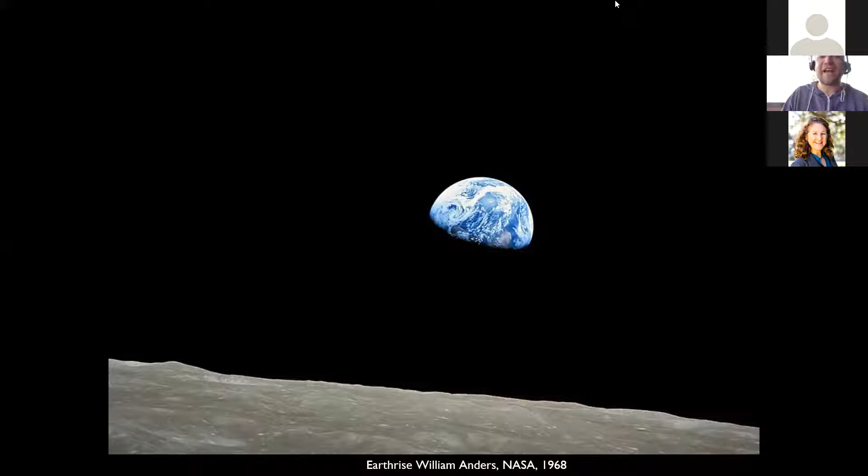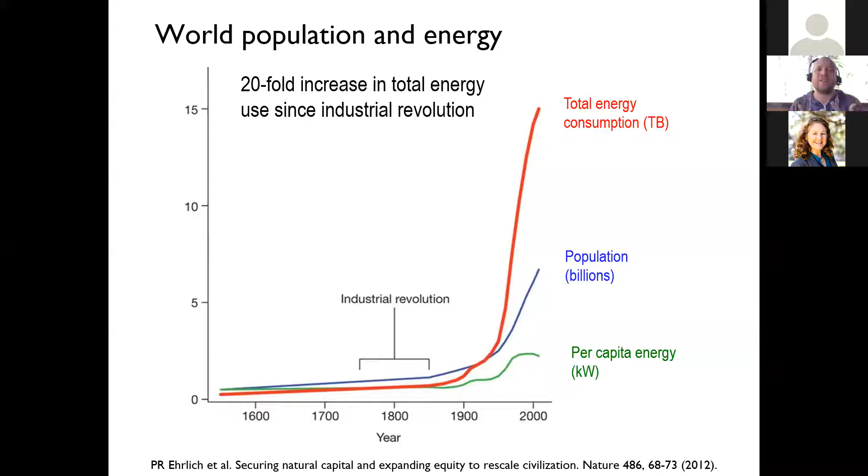So with that, we're going to launch into a whirlwind pace. We know that everything is collapsing around us. It couldn't be more true now than at the beginning of the semester. But with increases in population, the climate is taking an impact, and associated with that are the health impacts with emissions that make you more susceptible to pandemics. All of these things are intertwined, and all the topics within 140 are really part of an interconnected web where each piece actually influences the others.

We've learned about where industry uses energy—from buildings, transportation, manufacturing—and about embodied carbon versus operational carbon.

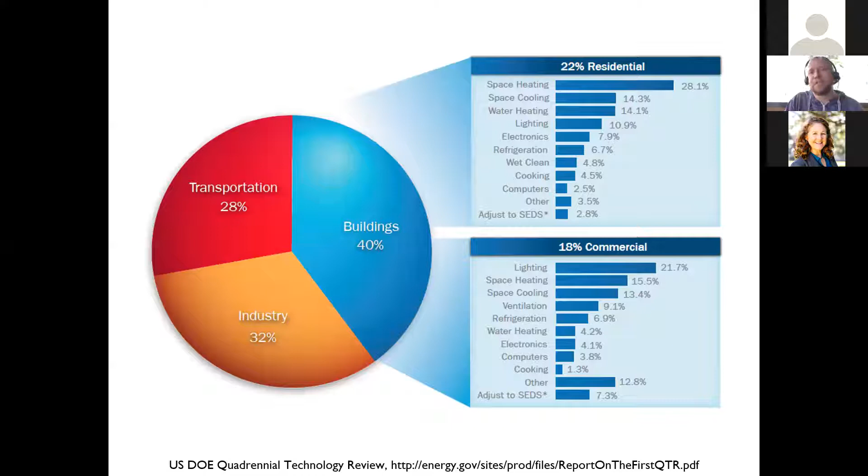At the same time, we fully realize that we can't just shut down the world to stop our emissions. I think right now, with everybody staying at home, you've seen a really robust reduction in emissions, but it's not sustainable for everybody to stay home and hole up. There are a lot of jobs that require being out in the world and energy to be used. But the role for us as designers, engineers, and architects is to apply that energy in the most efficient way we can for the lowest emissions, and try to look at more holistic solutions from the energy standpoint. We learned about impacts to health.

This couldn't be more applicable now for our office in particular, as we're doing a lot of work with hospitals right now to rapidly transition them from ICUs into isolation rooms. A lot of the elements of health, building efficiency, and emissions actually have a direct impact on your body's ability to fight infectious disease. So there's a correlation between the stuff that we talk about in 140 and the impact on real people's lives.

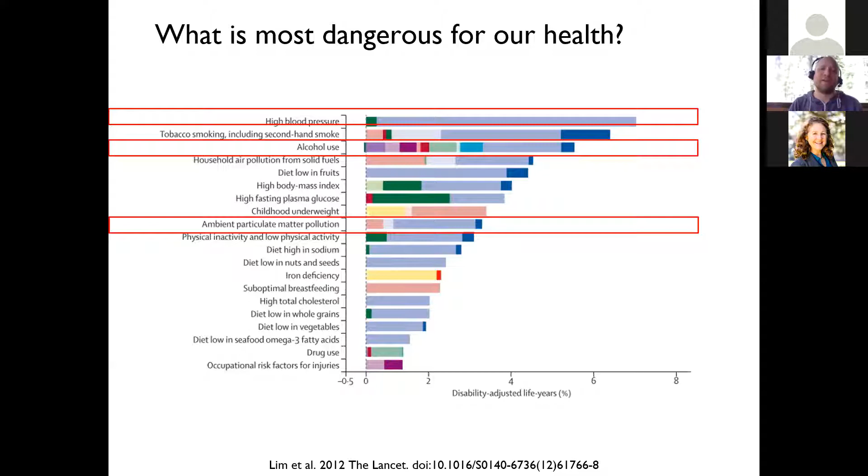We talked about thermal comfort, how your body begins to sense energy, temperature, humidity, air flows around you, and how buildings can begin to respond to that through reactions in shading and facade design.

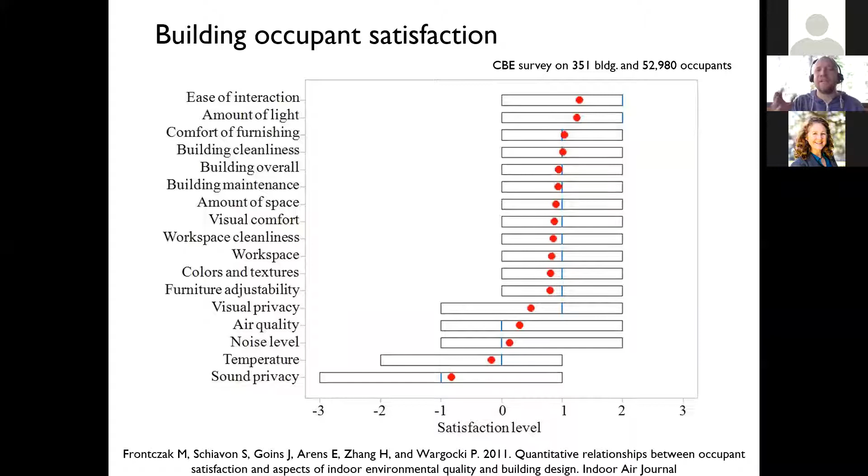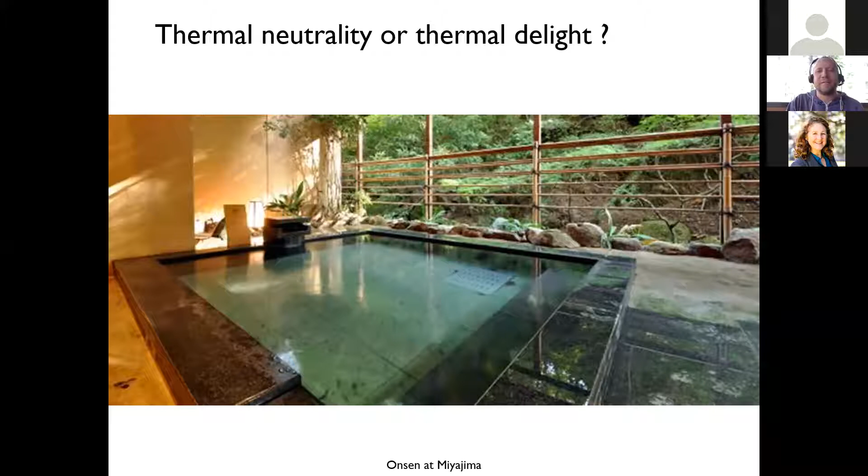We talked a little bit about occupant surveys, post-occupancy evaluations, and trying to learn from the workplaces. Some of the exercises that you guys did in lab are actually adapted from real POE processes that we use in life. Gail talked about thermal delight versus thermal neutrality when we talk about thermal comfort, variations in space, and trying to get away from this idea that steady state is normal, because we know that it's not.

We folded in the ASHRAE thermal comfort standard and the expanded thermal comfort study or standard. I can tell you right now that I use this, granted I'm a mechanical engineer doing heating and cooling systems, but we use the standard every week on every project. A lot of the really exciting work that we do is finding novel ways to maintain comfort with lower energy use, and sometimes that means thinking outside the box.

But again, the robust work for you guys of understanding how the body actually perceives space from a thermal standpoint is really important. And it hopefully will change the way that you design buildings.

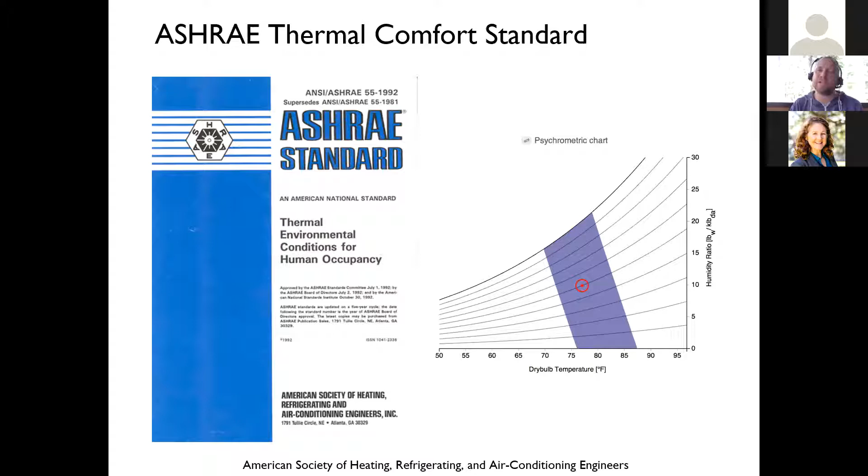We briefly talked about the psychrometric chart, how to move around it, what it means for humidity and temperature working through the space. But I think one of the most important diagrams that we talk about in this class is the inverted pyramid. So if there's one thing that you can take away, I hope it's this.

And I hope that you think about this on every project, because I know we do in our practice, starting with the dumb and simple things about reducing loads, thinking about passive systems, how your building fits into the climate, your climate analysis, even your final project where you guys are doing climate analysis. It's not just about doing it and throwing it on paper, but eliciting out or pulling out from that data, what does it mean? What does it tell you about seasons, about different times of the day, and which passive strategies could really align with your location?

We jumped into active systems, and I talked extensively about energy recovery, one of my favorite things, and then getting to net zero energy through renewable generation. So this is definitely one of the elements of 140 that resonates the strongest with me.

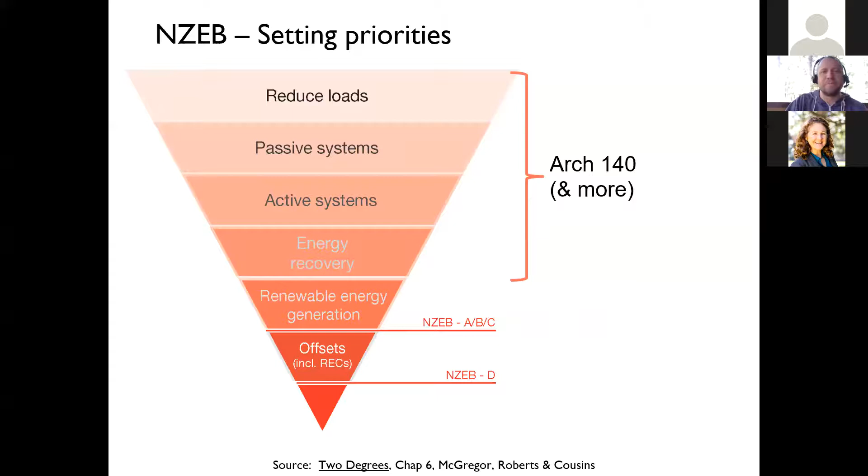We talked about how building massing has changed over the years, especially with the advent of air conditioning. Gail talked about that in the HVAC lecture. But understanding that we've moved away from these skin-dominated buildings that were really well daylit, very well naturally ventilated, and we've moved to sort of sealed boxes.

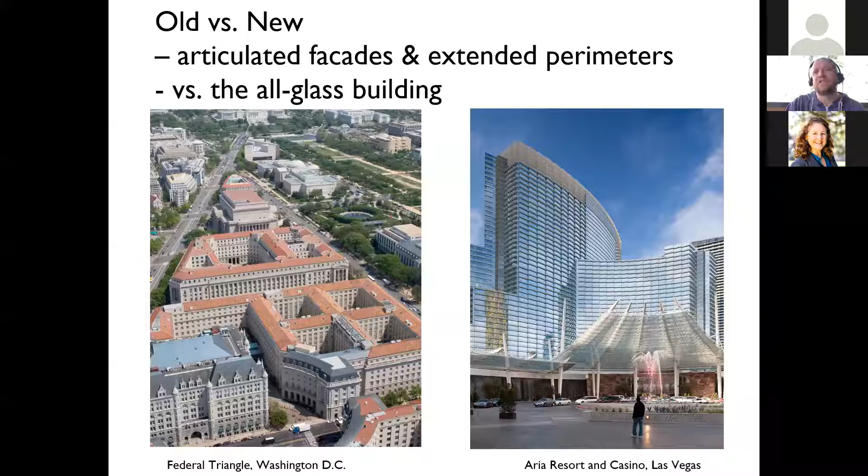And now there's a huge movement within the industry to move back, which is really exciting to watch, and get away from the normative design of the dumb solution and the easy solution of just doing an all-glass building. We talked about lots of case studies.

I think if there's one thing, before you leave for the semester, I really encourage you to download all the lectures if you haven't already, because there's a lot of case study projects in there that will give you sort of inspiration for the future.

The Lucile Packard Foundation building is one that still resonates with me all this time, both as a beautiful building, but also a really low energy building with great responses from staff and faculty inside about how comfortable it is.

If you go all the way back, super far back in the semester when we were talking about thermal mass, it even came all the way up until the balance point game in lab, understanding the role of materials in the building to store energy and to give you load shifting.

So it wasn't just about comfort that we talked about at the very beginning, but also pulled it all the way forward into the HVAC lecture, our electrification lecture, where we were talking about load shifting, and that the thermal mass of the building can actually provide some of that load shift that we're going to need to design grid-responsive buildings as we electrify and decarbonize our society.

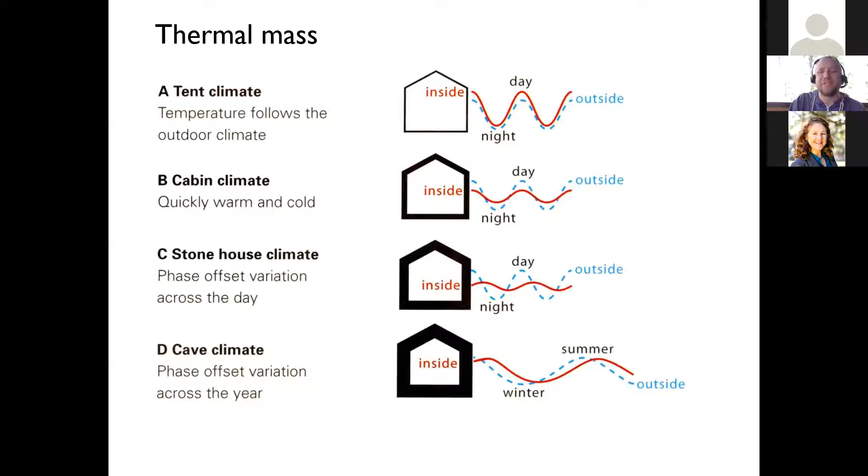We had some examples. I'm not sure if the Dominus Winery actually showed up in one of our thermal mass lectures, but it's a lovely project in Napa. It's private, so please don't show up without an appointment - I tried that and got in trouble. But it's a lovely project that incorporates both elements of thermal mass, climate-specific design, as well as gorgeous lighting effect and daylight strategy.

Another one of my favorite topics, we talked about thermal bridging. With all the ski resorts closing very early this year, I had wished I'd gotten to do more of this, but it's a great place to reflect on what you guys know now about building facades and building elements. We tied that back to the three modes of heat transfer: conduction, convection, and radiation, and understanding how air movement across the site can actually strip heat off of your building.

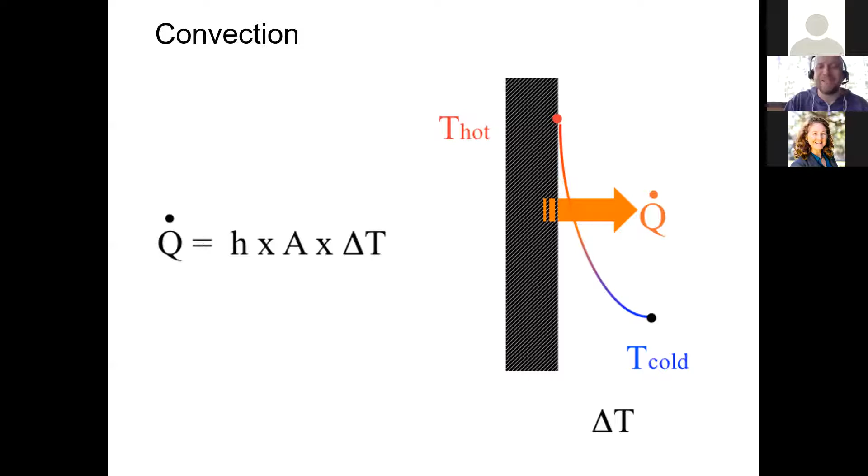Those air films - don't forget, every U value that you calculate must include the air films. Air films are your little friend that should carry with you.

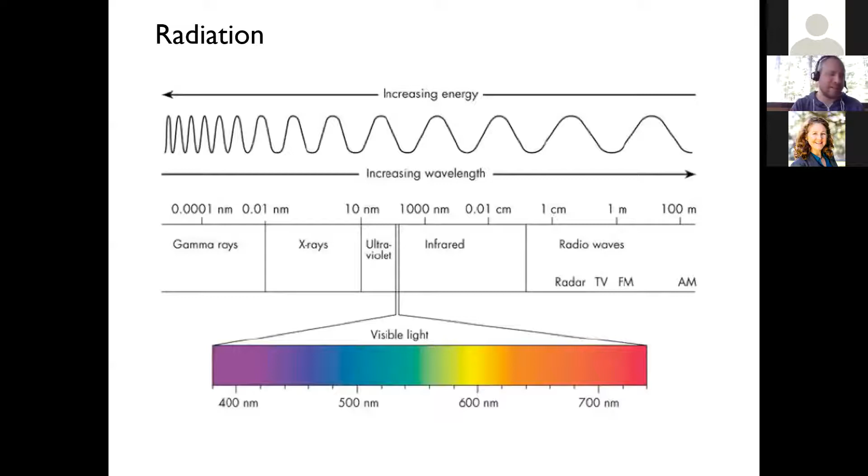For radiation, we talked both about the near infrared as well as the visible light portions. The infrared being that heat piece that we are trying to fight against or protect against. Those are a really key element.

Briefly talking about the impacts of materials on radiation, so designing cool roofs in lieu of dark asphalt roofs that we had historically, and how that can reduce energy, increase comfort, and reduce heat island effect.

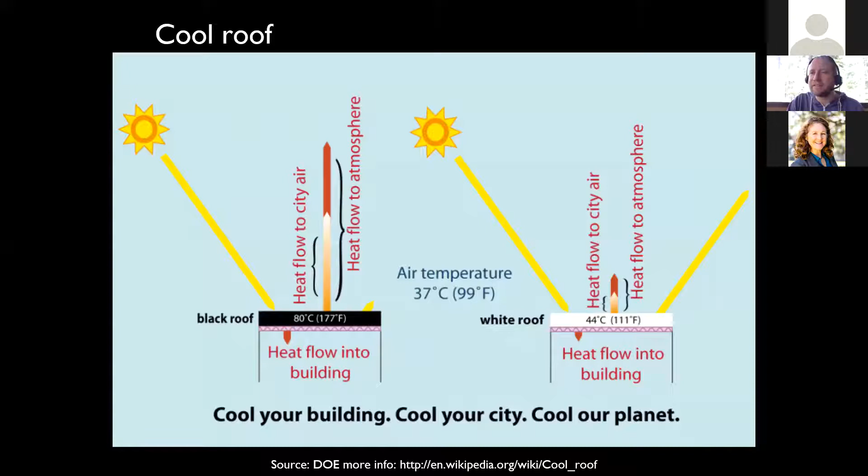That same radiation we can actually use as a tool. So I showed a lot of images of false color thermal camera images, looking at surface temperatures and trying to identify locations of air leaks or missing insulation or air ducts that are in the facade, which they should never be, but sometimes they are.

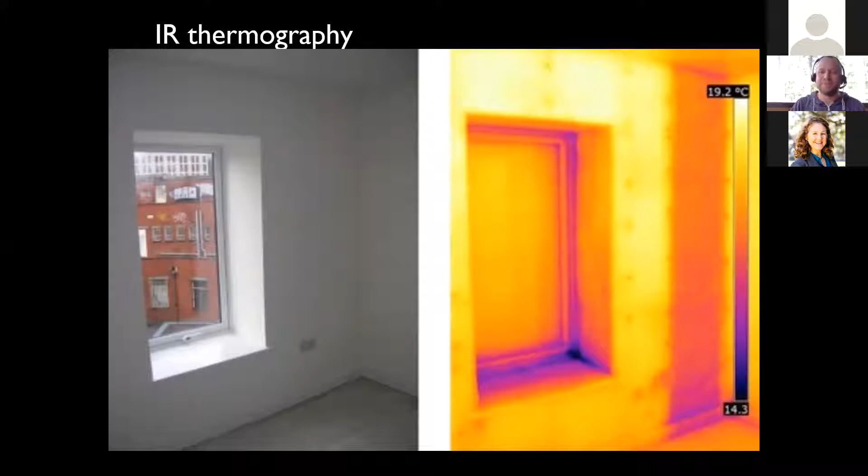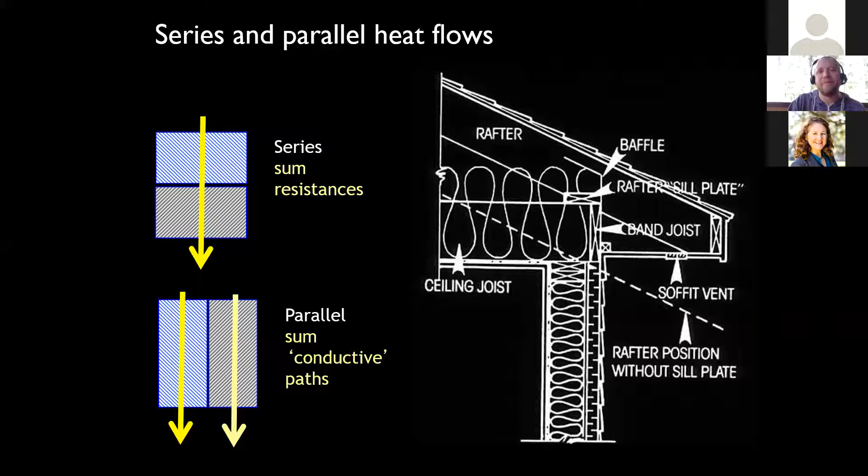And I know all of you thoroughly enjoyed covering series and parallel heat transfer and the house box that we studied for what felt like 7 weeks, starting with series and parallel heat transfer and moving into understanding what those assemblies are, doing therm analysis, or at least looking at therm and understanding its role in evaluating windows. For the series heat transfer, all the lovely R values that you guys now have in your heart.

What's the typical R value per inch of mineral wool insulation? Eventually these things will stick in your head - you'll know that it's 3.4. You'll know that polyisocyanurate insulation is about R6 per inch at the beginning, but tends to degrade to about R5.5.

Trust me, you'll love R values in your career, and this is just the start. 140 is just the start of being able to take those values and start building that library in your mind, to be able to react very quickly about getting the most performance out of the smallest cost, or the smallest carbon footprint, or the best health of the material.

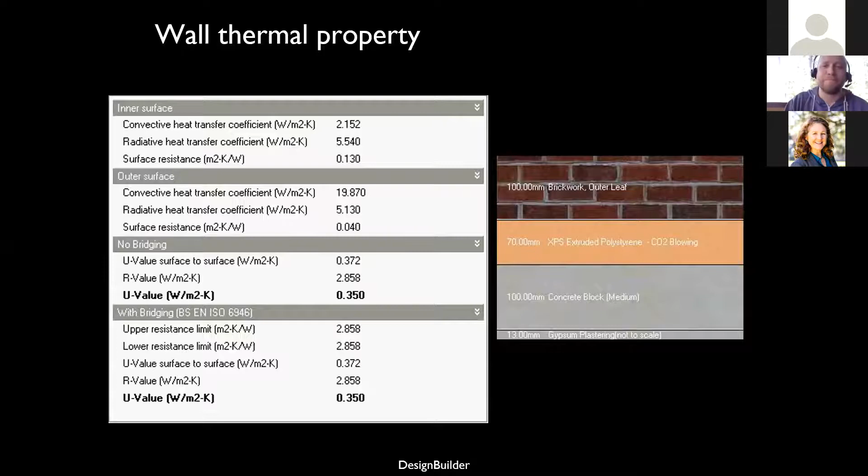We talked about the perfect wall systems. There were a lot of resources we gave you during this section from Building Science Corp - I'd definitely recommend going to their website if you ever have questions on facade design. I also listed the resource of 475 High Performance Supply, which has a series of free books on high performance buildings that are low embodied carbon and low toxicity. Great resources - pull those lectures down, use those resources.

They're really at your disposal, and again, they'll set you apart at your office. I can't tell you how many folks I've worked with over the years that don't have the 101 level of knowledge about building performance, and it gets them in trouble. So you can really set yourself apart and drive performance and human factors and health, and become the expert in the office that you go work at.

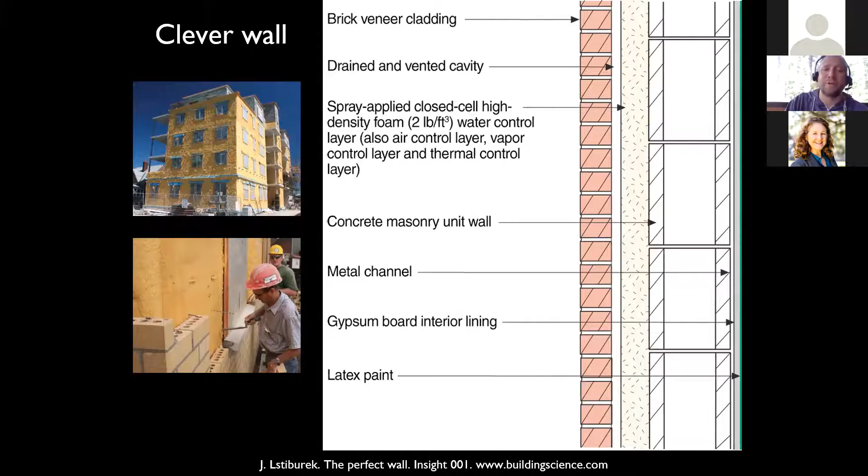We talked all about different types of materials for insulation, and when Sarah gave her lecture, she even folded in elements of health and toxicity with that. And when I talked about embodied carbon, we did the same. So there are lots of factors that complicate this decision - it's not just something that you do once and forget and say, oh, there's the material of my choice.

There's a lot of factors, and there's going to be more. So as you guys go out into the field, there will be more elements that you have to consider when making every choice. I think that's the resilience you've shown during this pandemic is the same sort of resilience you'll need in the workforce, to take on new information and change over time, so you don't get stagnated.

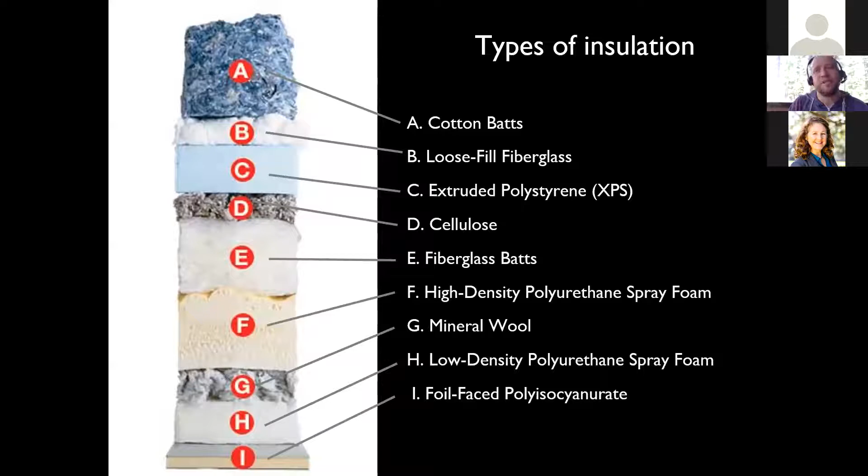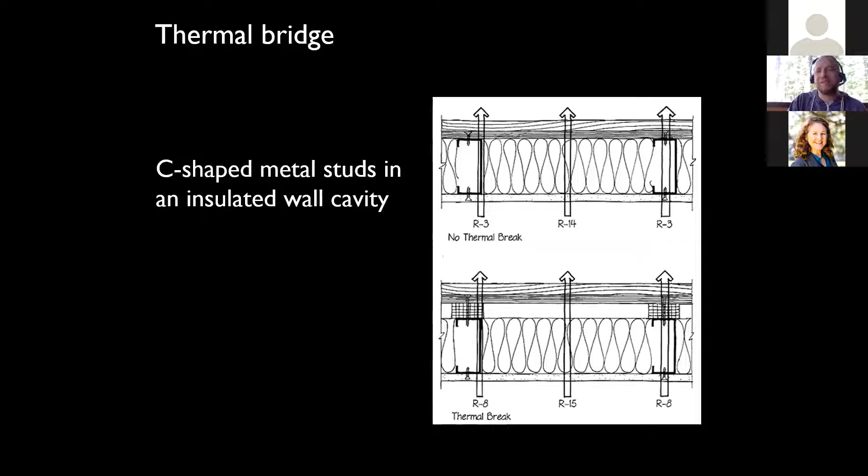Again, we talked about continuous insulation, blocking thermal bridging, and all the different thermal bridging strategies. I think I shared a lot. We did calculations for infiltration, and this is the blower door test we talked about, but designing buildings for air tightness, and then pulling all of that together into our whole building envelope calcs.

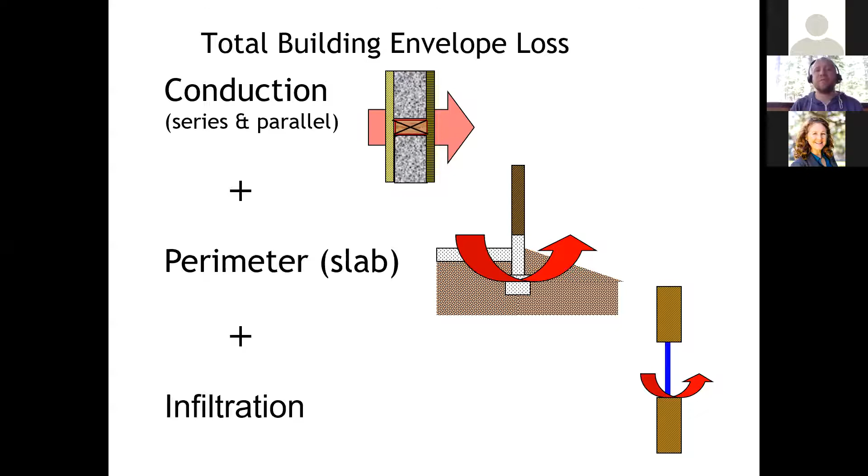Again, kind of truncated, shorter examples this year. We didn't have to do all of it by hand and iterate as much, but being able to pull in that full UA of your building that includes the perimeter slab and the infiltration and leakage. Taking that all the way into calculating your whole building energy use, and then ultimately getting you to this EUI, which is that label value that allows us to compare buildings against each other, regardless of square footage, because it normalizes against square footage, and gives you a sense of where you stand in the greater scheme of things.

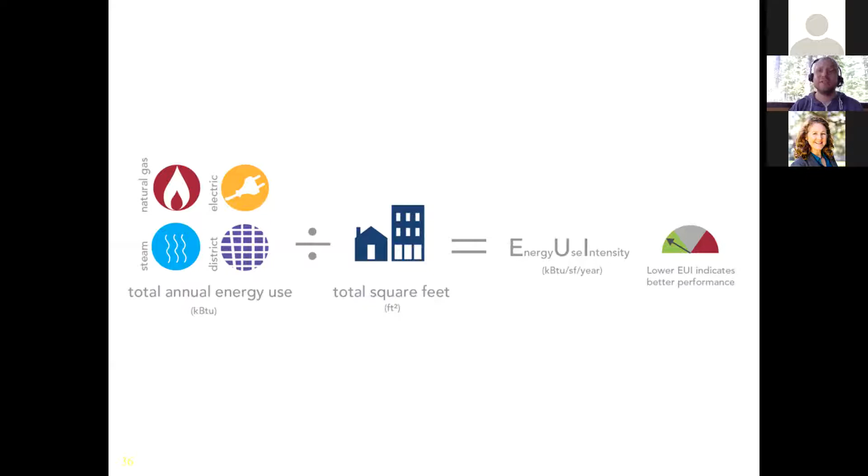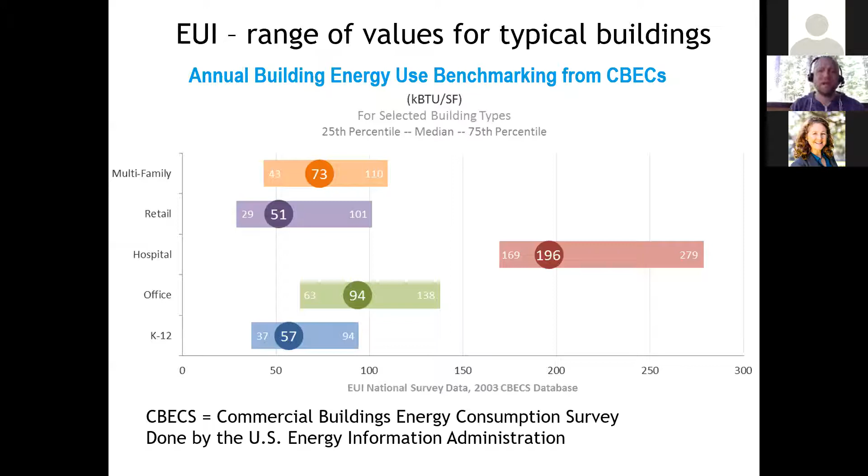Are you a hospital? Where should you land from an EUI standpoint? Are you an apartment building or a school? We can get benchmark data, but we can also design to be better than the benchmark. My goal for every project is to start with the idea that it must be net zero energy, regardless of whether they're going to do on-site PVs, but ranging that EUI to understand how you fit into the broader scheme is really, really important.

Obviously, we talked a lot about net zero. I'm super passionate about net zero buildings or net positive buildings. And I think that as you guys hit the profession, there's going to be a bigger driver from local codes, local states that are actually going to be mandating this as we decarbonize our society.

I think one of the most exciting things, if you've been able to stay around in the Bay Area during this quarantine, is just noticing the drastically improved outdoor air quality all around us. And if you're in any city—I have friends who work in New York and Chicago, and even in Dallas—everybody has noted that during this pandemic, the air quality has been tremendously better. People can see far off vistas that they haven't been able to in the past.

And it just sparks in your mind, well, that would be the case if our economy transitioned to a low carbon economy or a zero carbon economy. If we had zero energy buildings without combustion, if we had transportation that was zero energy or all electric without on-site combustion, and our buildings had gotten there, all of a sudden you start to see that this could be our everyday, where you could see Mount Rainier super clearly.

In the Bay Area, you could see Mount Diablo, or you could see past the Golden Gate Bridge out into the ocean. A zero carbon economy gets us there, and it obviously has visual impacts, but it has the health benefits as well.

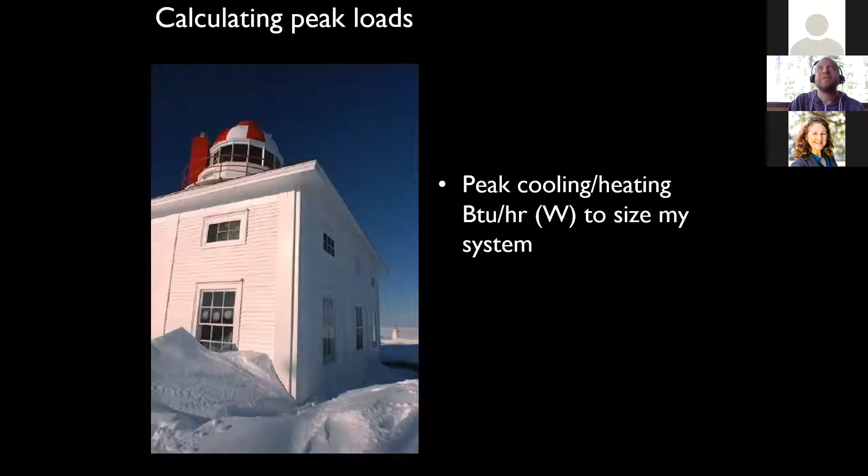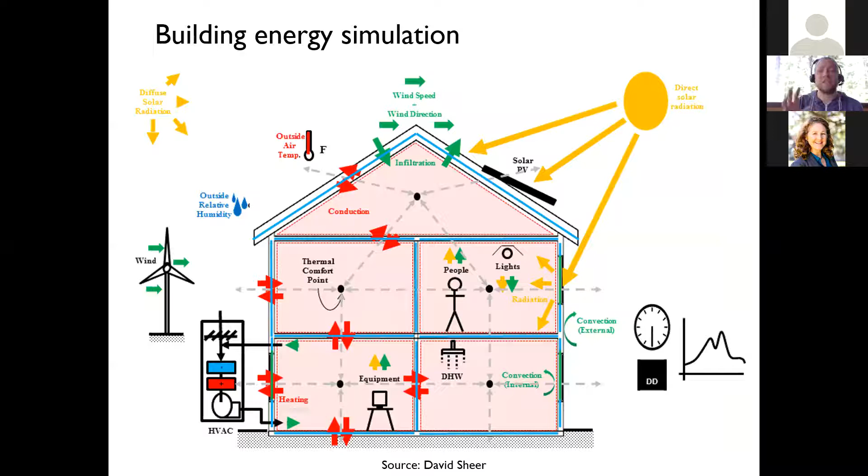So once we calculated whole building energy use, we did peak load. We talked about energy simulation, energy models, how they work, and you guys got to test out Sefaira as an early stage schematic design tool, and trying to compare your building against a baseline, whether it's ASHRAE baseline or Title 24 Part 6 baseline.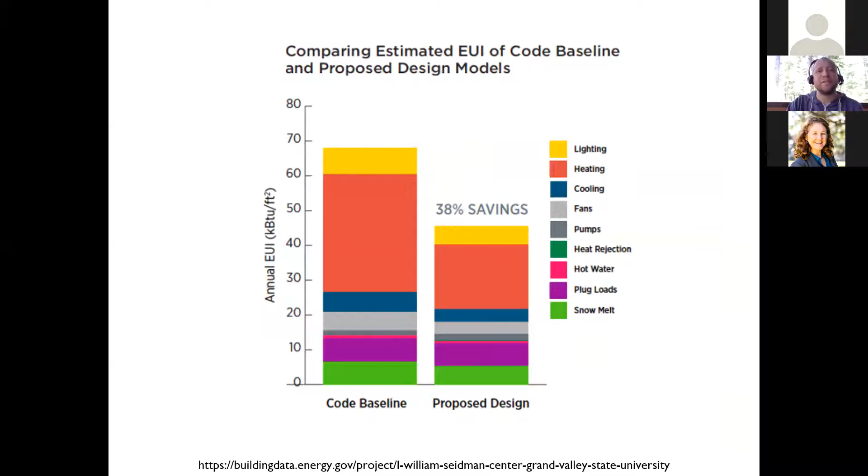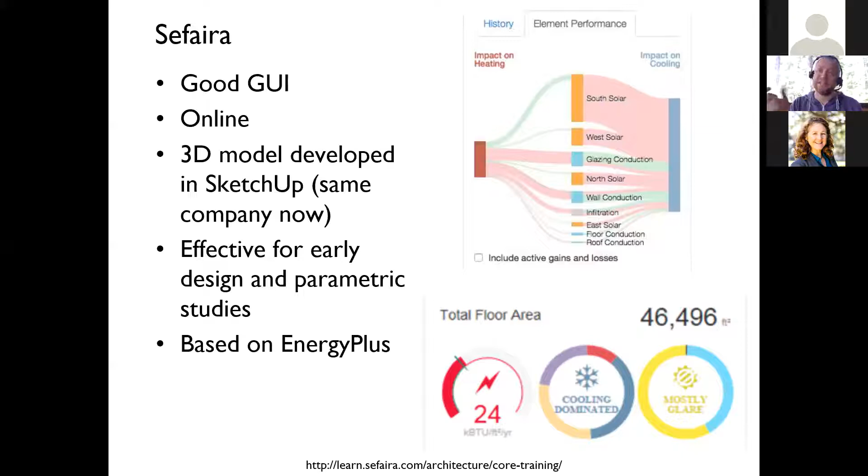And you guys got to do some iterations. We still use Sefaira in our office for some super fast, super dirty early energy models to get us in the right direction before we bring out the heavy gun. It's still a super valuable tool. And if you can actually bring that skill set to your office, it's a differentiator in what will become a pretty tight labor market.

One of Gail's favorite topics, and mine as well, is passive cooling strategies—really working with the climate, with thermal mass, with night purge, all the strategies that talk to setting your building in a place are really exciting. I think that any building that strives for passive strategies requires a fundamental understanding of where you're putting that building, and it makes that building extremely unique. It makes that building situated where it is, and it couldn't be anywhere else. And that makes for really exciting architecture.

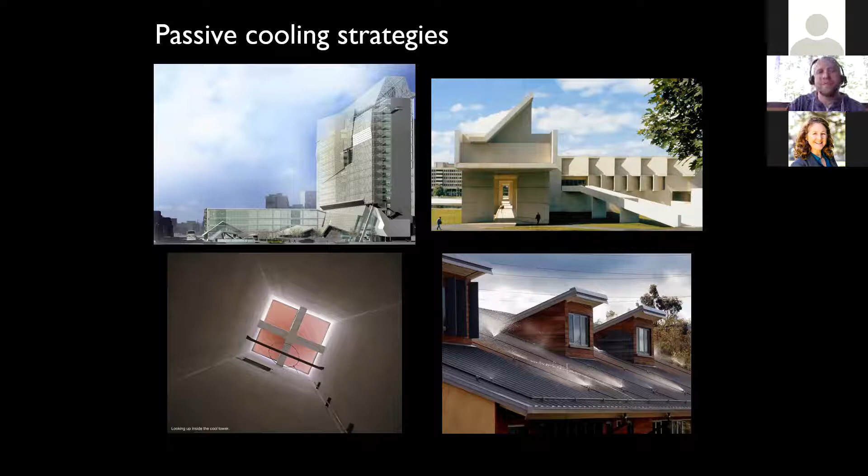Lots of examples of beautiful daylit buildings, solar control, even examples from Berkeley's campus. This is the biosciences building that our office designed with exterior shading and diffusion layers to get that really nice daylighting, supported by Susan Ubbelohde and her office.

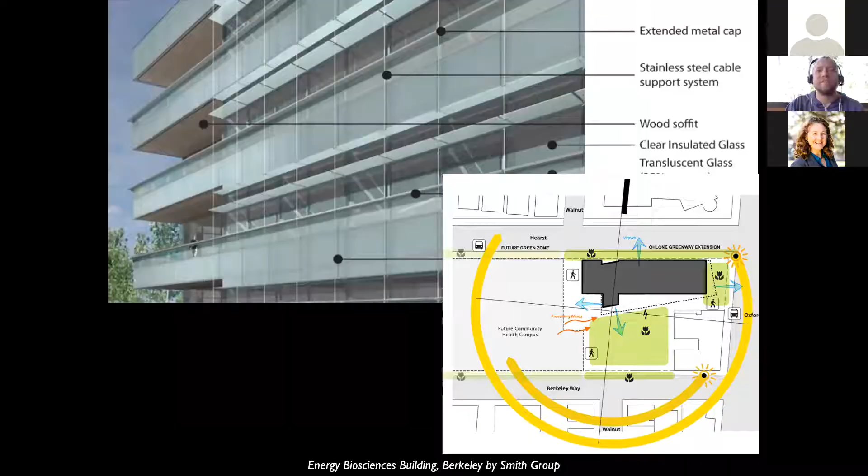Lots of examples when that's not done. It doesn't take a whole lot to drive around the Bay Area at all the tech offices and see lots of glassy buildings where the shades are fully drawn all day, every day, and all night, every night, because the spaces are overlit and not controlling for sun and glare, which you guys have been learning to do through SketchUp and physical modeling, to deal with visual comfort, daylighting, and solar control. So again, these are super useful skills.

Ironically, we're getting asked now to come down to several of these tech buildings in San Jose and Santa Clara and retrofit them with better facades, because the owners are realizing they can't put people up against the facade to sit there since it's so uncomfortable and the glare is so strong. So they're losing out on leasable square footage. Having skill sets to understand solar control, solar geometry, daylighting, and visual comfort will give you a leg up in helping your clients actually get the most out of the buildings they build.

Every year we do a little test to see how well you understand solar geometry, and in general the class did pretty well this year. There's a couple hands here pushing in a few directions that might not be where the sun is, but I love this exercise, and I hope right now, wherever you're sitting and sequestered in place, that if I asked you, you could point to where the sun should be and have a better understanding.

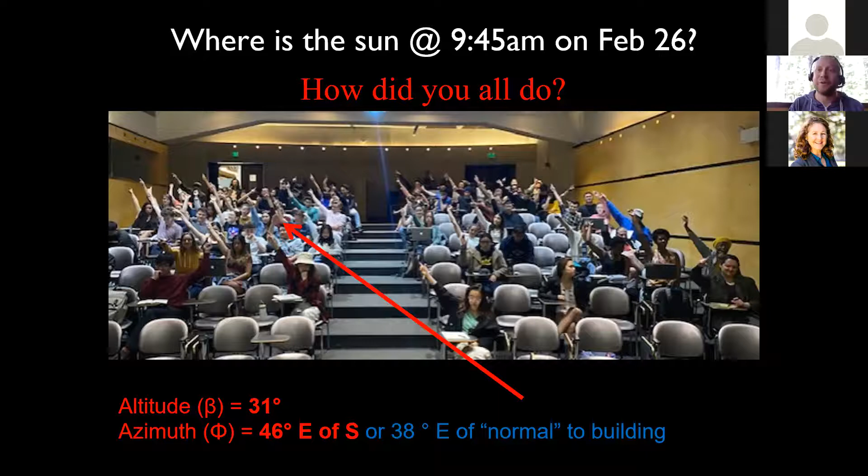Because it gives you a sense of place. If you walk through the day having these things in mind, thinking about daylight and the locations of the sun, it starts to help you situate and ground yourself where you are, and hopefully your buildings will be as well.

Yeah, love solar geometry. Talked a little bit about the changing quality of light across the day and the diurnal swing, looking at regions of the Arctic, defined by any location on Earth with at least one day of 24-hour sun and a day of 24-hour darkness, versus the tropics, which generally have pretty equal days across the seasons. Probably one of the only places in the world where you could stand entirely within your own shadow with the sun directly overhead.

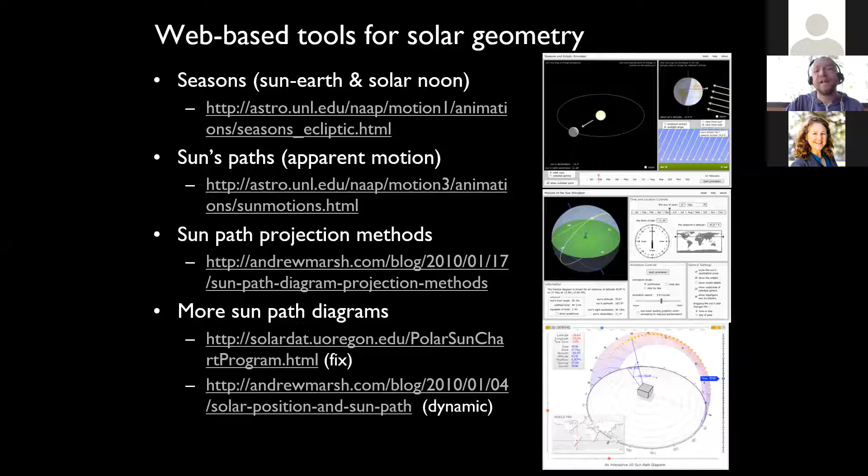We did a bit of a lot of SunPath diagrams, both digitally and analog, understanding when solar radiation is at its worst or its best and how to leverage that, and then what window technology to bring to the game.

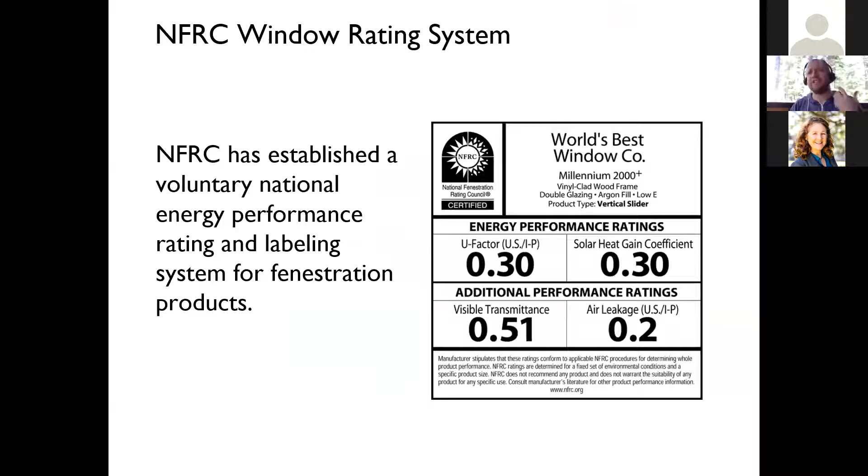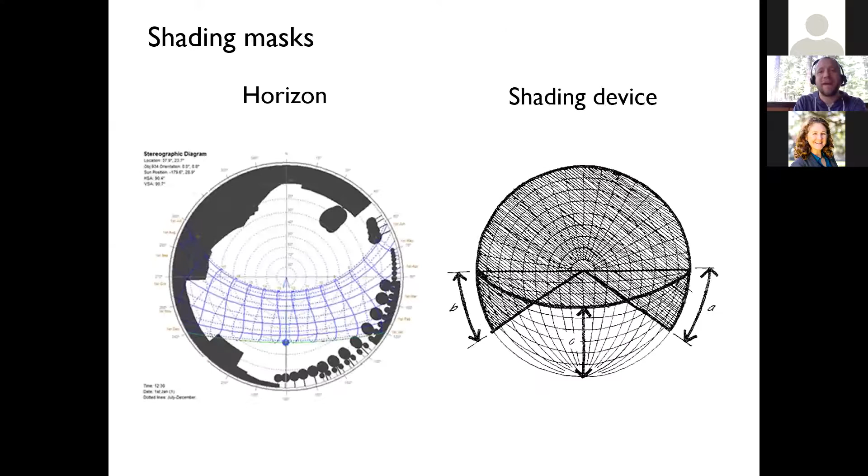So once you've done all your shading strategies, what are the strategies for looking at window technology and glazing, and site horizon shading masks, which are really effective at deciding whether your building actually needs shading or whether the location of the building itself provides the shading you need. We talked about examples of that, including the Apple Store.

Lots of shading masks. You guys are going to be experts at shading masks. You can drive shading masks. Just yesterday, I presented a shading mask to a client to help them understand why the overhang on a certain building was going to need to be 14 feet.

Because they had asked us for the CEO's office to never have direct sun on his desk, we showed him about 12 different shade designs that actually achieve that. They picked the one with the super deep cantilevered, thin overhang, because then they could occupy the outdoor space for much of the year, as well as a sort of outdoor terrace.

So I can tell you shading masks are real. It's not just a 140 thing. We use them in our office all the time.

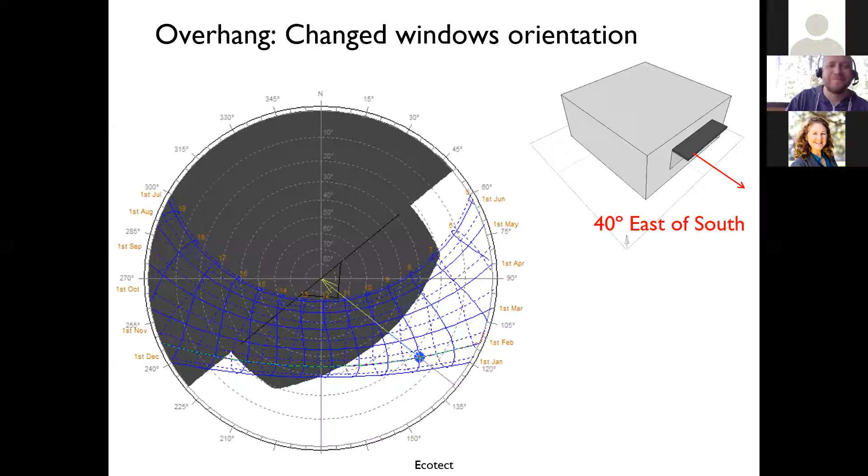Understanding just lots of variety of shading strategies across the world. I didn't have time this year, but I have an entire slide deck of shading strategies from when I go on vacation. So you guys know I'm kind of a nerd. Whenever I go on vacation, especially if I get a chance to go to Europe, my partner and I will go to as many buildings as we can, and I'll document shading strategies for different climate zones. It's a fun way to start touring lots of really nice architecture, and also inspire yourself to not just think of normative design.

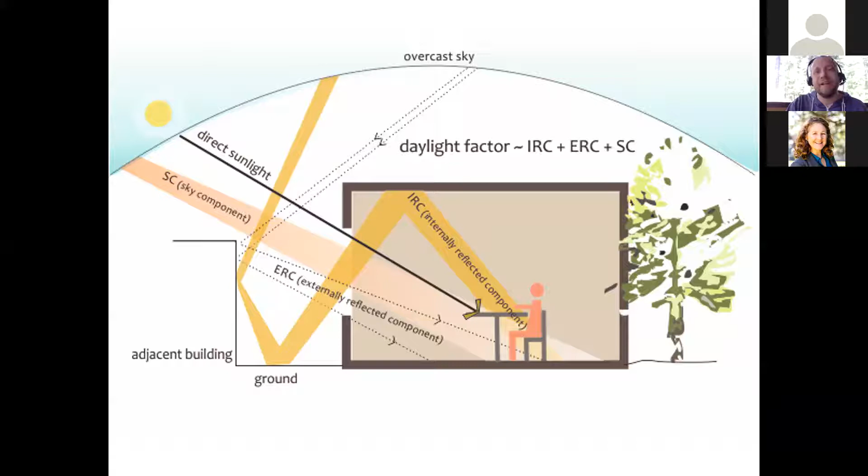Daylight became a huge piece of the class, for your final project, and understanding case studies for that, looking at different times of day and qualities of light. That exercise was really exciting, understanding how light can pull out texture over the course of the day and give a dynamism to your project that you might not otherwise be able to get.

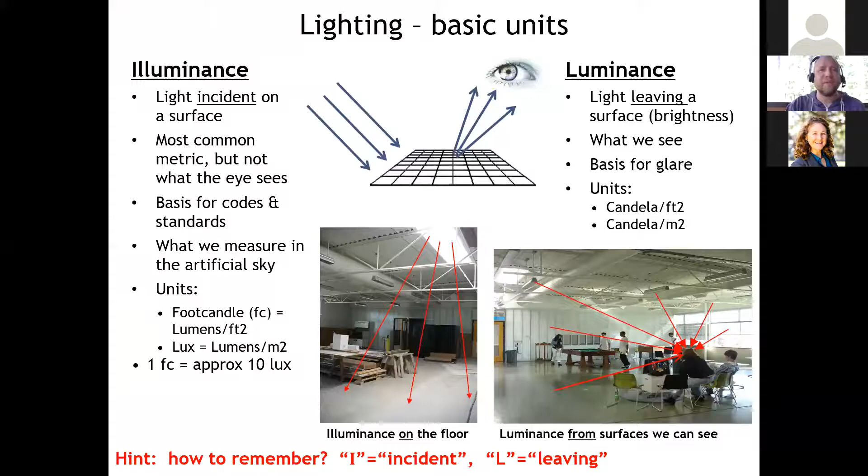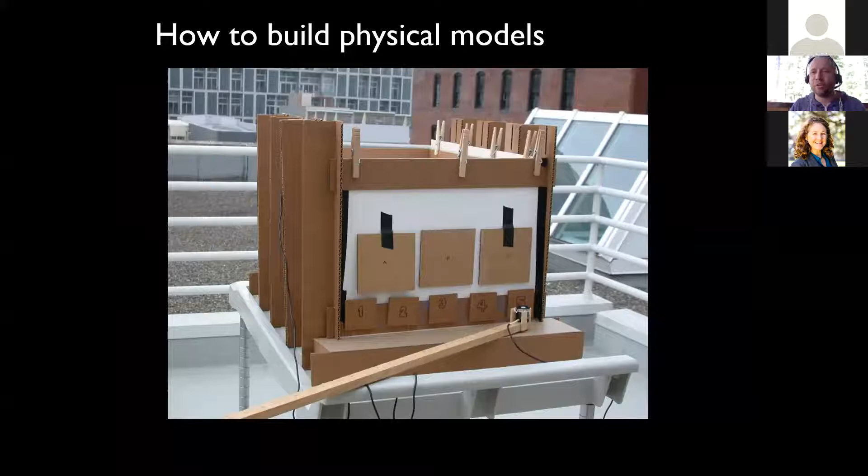We talked about electric lighting and not just daylighting. I wish we could have spent all the time we love to do building big physical daylighting models. I know some of you have done it in quarantine, but it's one of my favorite things. Instead we got to spend this year in our masks, quarantined away from everywhere, not able to use our overcast sky simulator. So I encourage you, there are other overcast sky simulators out in the world that are available, and if your office happens to be near one, dive into it, because it gives you a really amazing chance to test your designs.

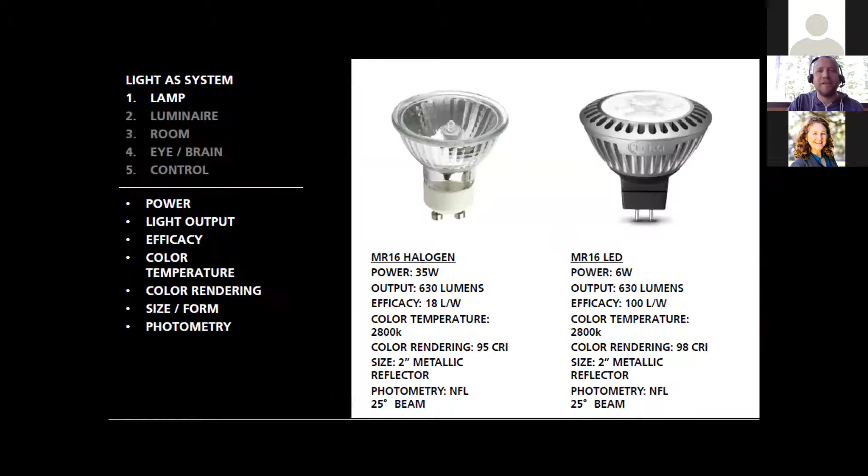Understanding different qualities of daylight, what daylight can do for your project to enhance it and make it amazing. Different lighting technologies, lighting systems, and a little bit into lighting efficiency.

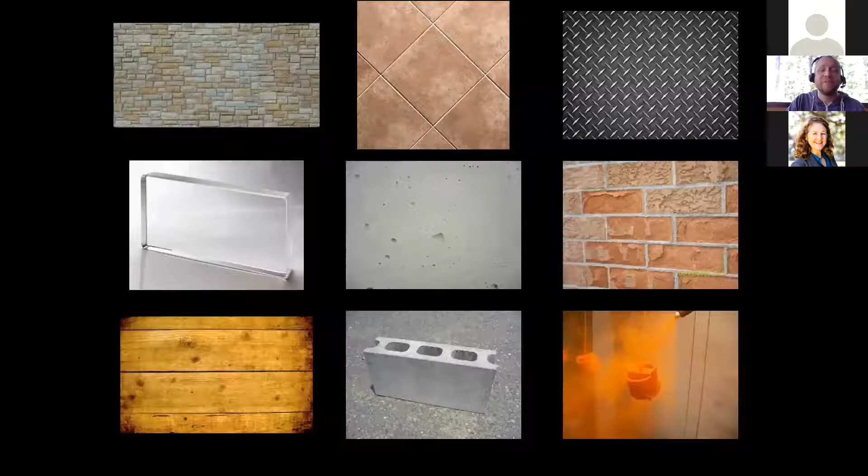And then we jumped into different materials. We talked about embodied carbon, what it takes to actually build materials, and the energy associated with that. Gail and I both introduced a whole bunch of standards around energy use and sustainability, from LEED to Living Building Challenge, Passive House, and building codes all across the world, to understand what is the worst that you can build and what is the best.

How do you strive to get even better? A lot of those systems, like the Living Building Challenge, LEED, and Passive House, are actually striving for better and best. So we talked a little bit about baseline codes, but how can you make your projects even better? I don't want to harp too much on what it's like in practice, but that's how we differentiate ourselves in the market - going into interviews for projects trying to show them what the future could be, not what we've done, but what they could be.

And it resonates with a lot of clients who are trying to strive for carbon neutrality and better health for the students on their campuses, and for the occupants of their buildings. The Living Building Challenge is obviously one of my favorites, having worked on a number of them.

It's an exciting framework, one that keeps evolving and getting more challenging. Something for us all to strive for is that circular economy that Sarah talked about - the building that doesn't take much to build and can disappear at the end of its life with little impact.

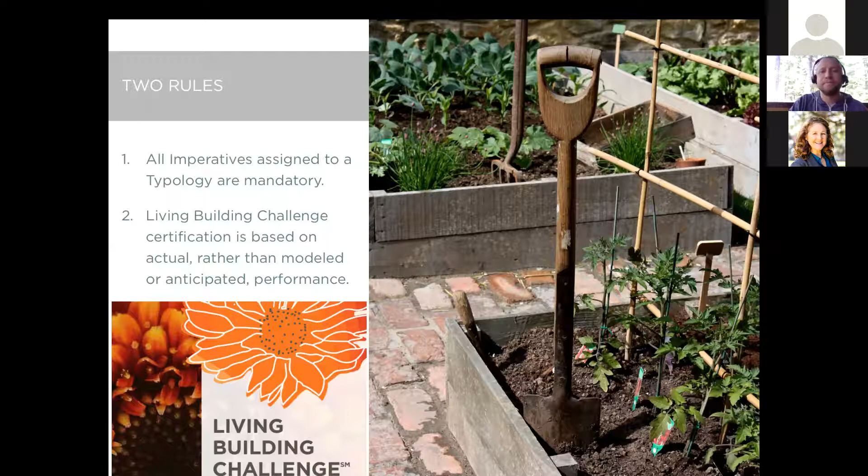We gave some examples. The Bullitt Center, again, is one that we talked about a little bit in class, and it's one of my favorites. If you ever have a chance to go up to Seattle, they give free tours, I think once a month, of the project.

Side note, if you go on the tour, the last part is to go down into the basement to see the composting toilet system that serves the whole building, and they will give you a bag of human poop compost that you can take with you. It's very exciting if you like very low water use buildings and innovative design. I still have a couple bags of human compost to show clients.

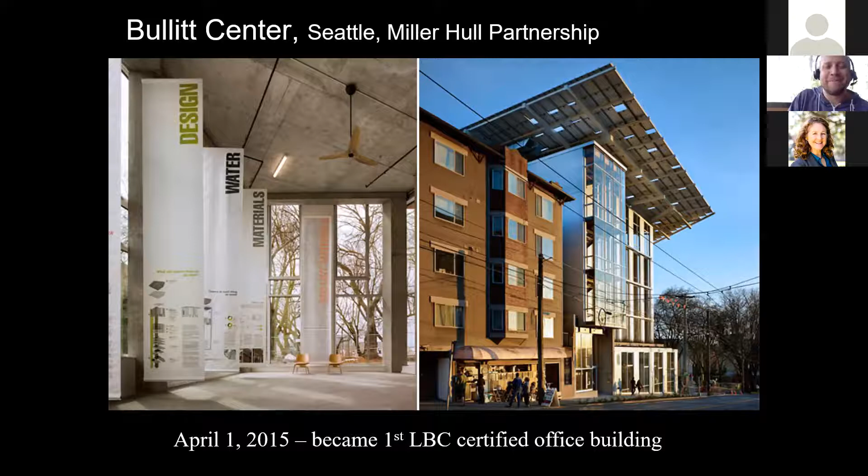We talked a lot about all the elements that go into the built environment - the WELL Building Standard as a place that expands beyond built materials and goes into the quality of that space, the health of that space, and how it nourishes the body.

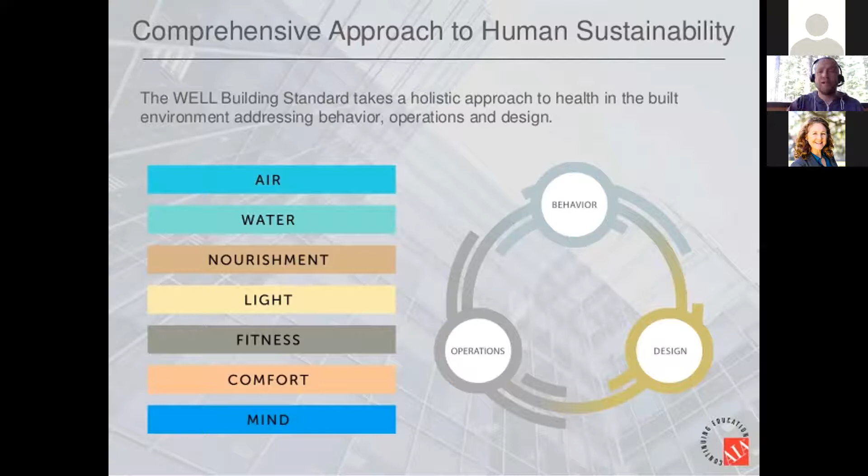I talked a little bit about the duck curve and what renewables on the energy grid look like, and the change in what our buildings will need to be when you begin designing. We're not just going to be focused on efficiency alone, or on slapping PV panels on buildings alone - we really have to think about how our buildings fit into the broader context of the grid and how friendly they are to the grid.

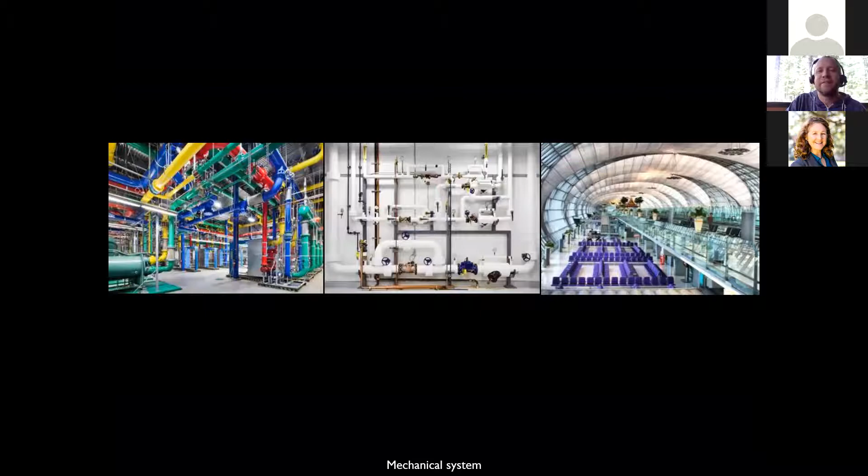We covered mechanical systems, HVAC - love it. It's going to be in every one of your buildings unless you design exceptionally passive buildings.

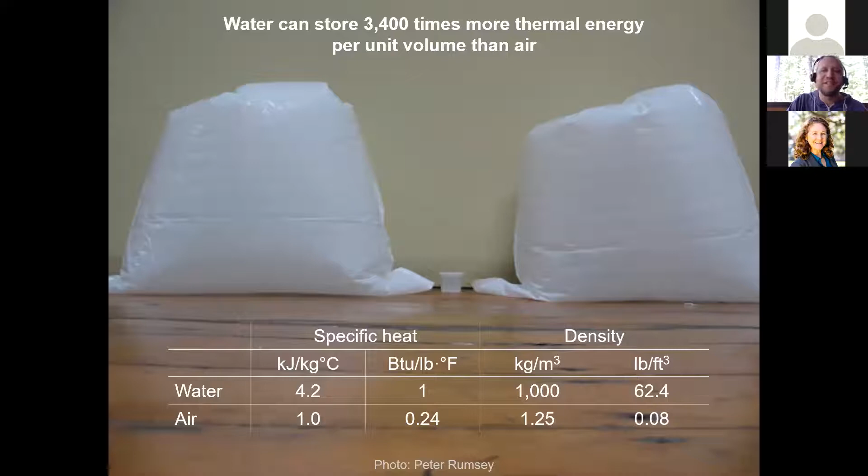We talked a little bit about the reason that a lot of our projects go into hydronic systems instead of air systems, the different components of the majority of the mechanical systems, air handlers, chillers, cooling towers, and how that could be expressed on buildings, like the Pompidou on the left, but then also how if you completely ignore low energy systems, good chunks of your building, as in the example on the right, end up taken up by mechanical systems because there's no shading and the glass is relatively low performing.

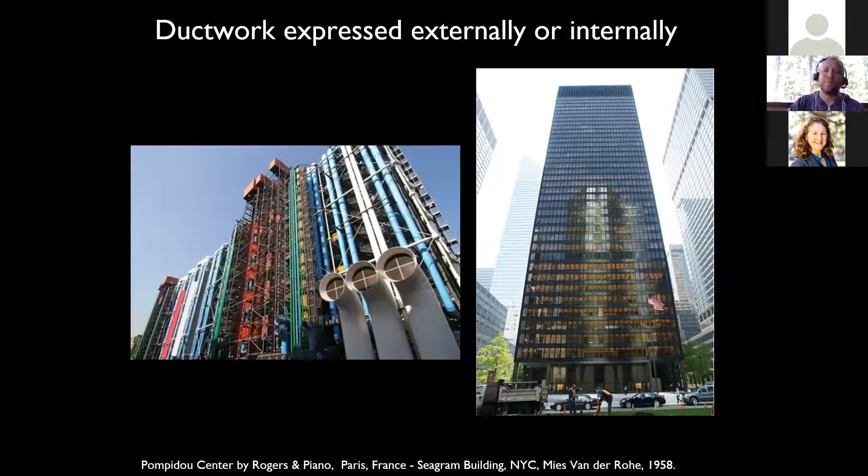Some new lectures you got this year that were updated relative to current situations are on embodied carbon. We talk quite a bit about the amount of energy and carbon emissions associated with building our buildings and how you can make choices to actually reduce that embodied carbon, which is really important because the time value of carbon is now. Now is when we need to really worry about carbon. Just doing a zero emissions building that saves carbon in 80 years isn't going to prevent climate change today. We really have to focus on low embodied carbon materials.

A great lecture from Sarah, a former GSI, amazing student, pursuing her PhD, on all the different aspects of toxicity as it relates to materials. This is a topic area that has been growing rapidly over the last 10 years. Whereas when I went to architecture school, we barely talked about it at all. The only green chemistry discussions I had were like, oh, you should pick low VOC paint. And that was it. That was the entirety of the conversation.

There's so much more information out there about the materials we select for our buildings and how they impact the body, including not just respiratory issues, but also reproductive health issues. So an extremely important area, and Sarah gave a lot of resources to dive into and a lot of topics to think about as you go into design.

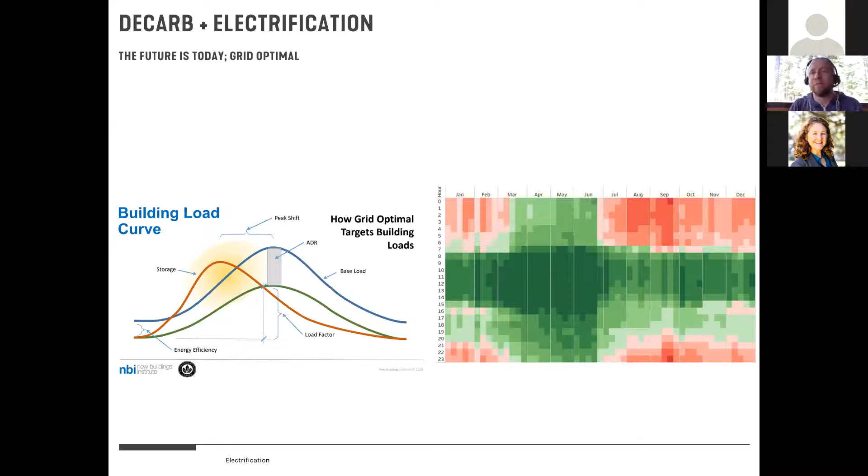So if you're looking for something to read over the summer, some uplifting reading while you're alone, there are some great books we could recommend. Drawdown puts out a plan for how we take our economy, flip it around, and reverse climate change. And then Enlightenment Now has a goal of trying to get folks back onto science and evidence-based progress.